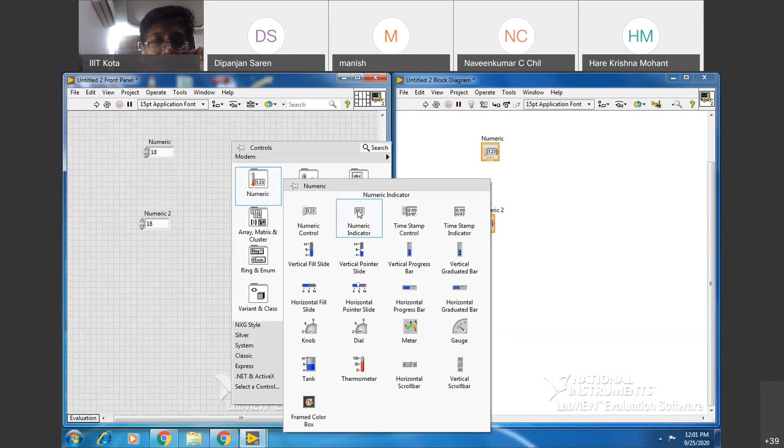Now how is the numeric indicator? Let me put, this is the control. This is the control 1. I have edited the name. Double click on the name, and this is the indicator 1. Now you can see the control 1 is giving one output, and the indicator 1 is taking an input.

So this is, I can connect the output of control 1. I am connecting it to the indicator 1. Is it clear? Now if I run the program, what should come? Can you see there is some name on the untitled front panel? There is a name on the front panel and block diagram.

Sir, I have a doubt. While editing the name of the indicator, if we press enter, it will just come down. How to get out of that?

Yes, I can write more description. See, these are the description actually. These names are actually descriptors. So suppose you want to add some additional description, that also you can put. LabVIEW allows putting some text description on the front panel or block diagram. So either you can put the description in the name itself, or you can put a separate descriptor somewhere else.

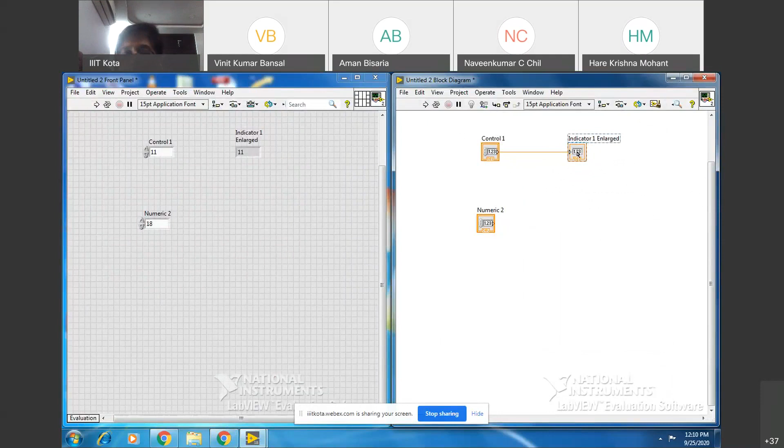Once, I will ask that you delete your indicator like this. You delete. I have done this. Can you see this, is it coming like this? Yes, sir. Can you put Control B? Please press Control B. The broken wire must have vanished.

Now again create the indicator. You have created the indicator. Name it indicator. Done. Now again connect. Yes, could you do that? Yes, sir. So this is one way of connecting, creating one control and indicator.

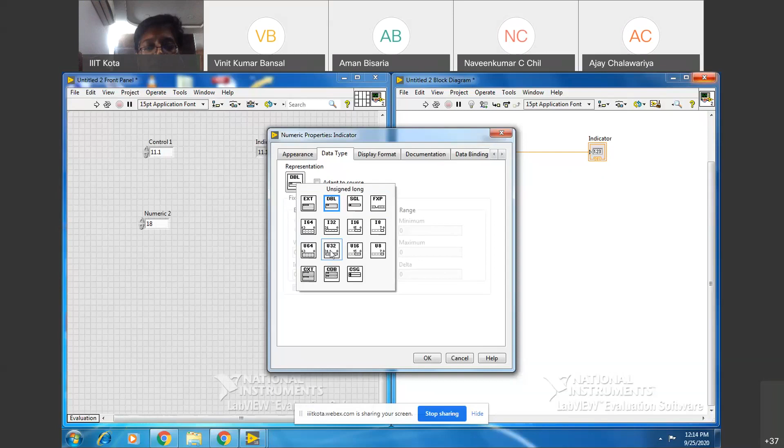In the data types, can you click on the representation DBL? Yes, sir, so in DBL there are so many options. This is extended precision, EXT. DBL is double precision, then single precision, fixed point, then integer. Could you see this - quad, long, word? Let me choose this long one. Then you have unsigned type also, so many things are there.

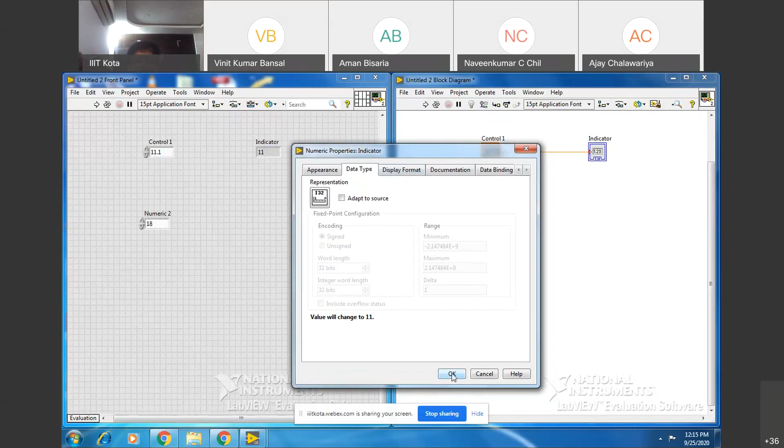So I have put the integer type. Can you see this value will change to 11? It is showing. Sir, should we select I32? You can select, no problem. Okay, sir, you can select. Can you see there is some change in the block diagram? The outer periphery of the indicator has become blue colored. Yes, sir, the outer periphery has become blue colored. Right, so I will click OK.

So now you can see the indicator. If you give the control 11.1, but since your indicator is integer type, it represents only the value of 11, right? If I put the value to be 11.6, what should it represent? It will represent 12, the next integer value. It is approximating, right?

Is it clear? So first thing all of you have to remember is how to make out the data type.

The data type in the LabVIEW environment can be floating point, which will be orange colored. Then it can be integer, which will be blue colored. It can be string type, represented in pink color, or it can be boolean type, the true-false logic, represented in green color.

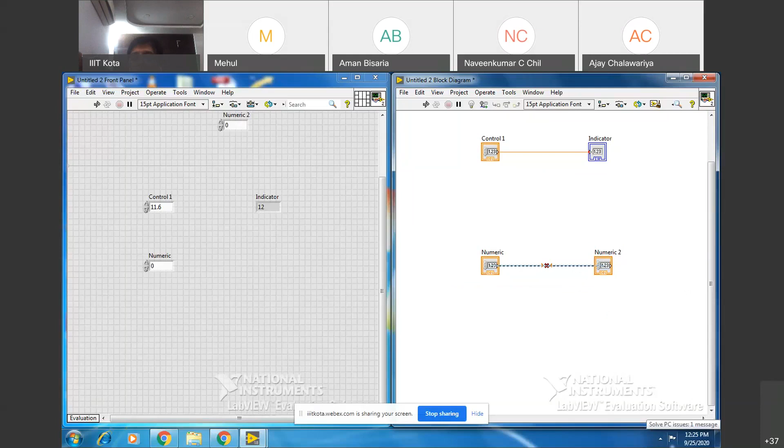So what I have to do, I have to show this broken wire, dotted wire, and then a red mark on that. It says this is an invalid connection. You cannot connect two sources. Yes or no? By definition you cannot connect two sources to each other, right?

When you take it now, have you seen one cylindrical object? It has appeared. The cursor has become cylindrical type. Yes, sir. So if I will just click it and extend it, what is it doing? It is taking one connection.

So that is another thing, and this one is for highlighting. Can you see the arrow type? This arrow type, can you see? This means this wire will be highlighted. So when it becomes an arrow, then only you should click.

Now you can select that particular wrong connection and you can press delete. That has been deleted.

Instead of this, what I will do, you just see this also. I have connected these two. This is a wrong connection. And then I'm connecting this also. All these are wrong connections, right?

Suppose I have to delete this particular segment, the top. What I'll have to do is highlight this and press delete, right? Then that segment will be deleted.

Okay, if I will put Control B, then what will happen? Actually, you always remember Control B will delete all the wrong connections. If I put Control B na, it will clear everything. You just see all the wrong connections, it will be cleared.

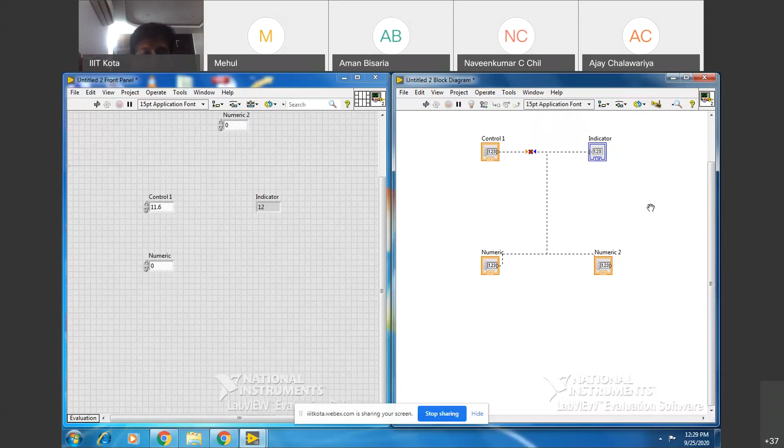Yes, sir. And redo wiring is what? Control plus Shift plus Z. Could you see, it has again done the same thing? Yes, sir, okay, so these things are already there.

Okay, so Control B you have to be careful with, because sometimes one connection is wrong, and since the system is interconnected, the wrong connection will be propagated backward also. Yes or no? Yes, sir, it may highlight many wrong connections. So if you use Control plus B for Bombay, what will happen then?

It will clear all the connections, all the wrong connections. So you will have to do it again, sir? Along with the wrong connections, it disconnects all the wirings. Instead of that, can we individually select and delete the wires? Yes, that's what I'm saying.

Suppose this has become - I'm connecting two sources to one indicator, two controls to one indicator. That is wrong, because somehow control 1 is connected to control 2. Now this control 2 - yes or no? So what is the wrong connection? Wrong connection is this much only. So if I highlight this wrong connection and eliminate it, that connection stays.

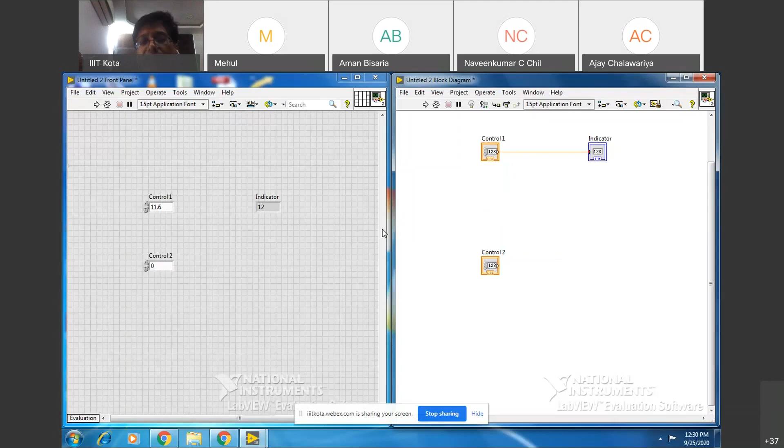But suppose I had done Control plus B for Bombay, then what will happen? All the connections vanish, sir. Means if it's a small circuit, we can manually do it, but if it's large, we need to go with this one - Control B. So use Control B for Bombay very carefully, otherwise all the connections will be removed - all the wrong connections will be removed.

Okay, so now some basics we have seen. Now let us see these on the front panel. Please come to the front panel, all of you. On the top row, what is coming? File - could you see new VI? Then edit, undo wiring, redo wiring. So these all - copy paste everything, then remove broken wires.

Could you see this Control plus B for Bombay? Then clean diagram. Cleanup diagram means it actually makes it compact.

Suppose it is scattered on the block diagram, like this, and now I'm putting Control U - it has arranged it. Could you see what I have done? It was like this - my panel, block diagram was like this. It was scattered, all the terminals were scattered. Now I want to arrange them. What I can do is bring them manually, I can put them like this manually - so this is one manual way. But if there are many terminals, it will be difficult, so I can take the help of - what I'll do is just put it like that and Control U. It has arranged, okay?

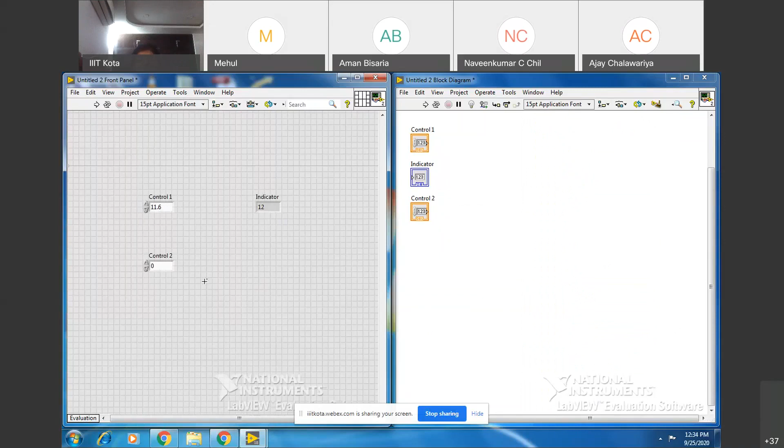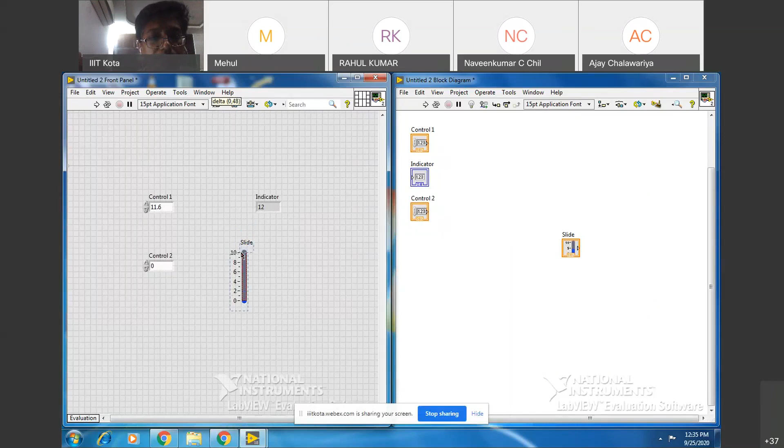Okay, now let us come again to the front panel. Right click, go to numeric control. Now this numeric control - just see, this was the numeric control, then there is a vertical slide. Can you see this vertical slide? Yes, sir, thermometer - sorry, slide, right sir, whatever you call it. So in the case of the numeric control, you can increase the values by 1. Can you see? The upside is the incrementer and the downside is the decrementer.

Can you see the hand? It has come up, yes sir. And with every click it will decrease by 1 - by whatever value you put, it will decrement by 1, and the up is increment by 1. If you want a specific value to be put, you have to write that, say 10. Okay, 10 you have written. So now if you increase, it will increase over 10 with every click, and it will decrease over the value by 1.

So that is one thing - now these are for discrete values. Suppose you want to calculate x plus y, so you'll give this kind of control. But suppose you have a continuous input, then you'll go for this slide kind of control. Now can you see this? I can enlarge it - I can enlarge it.

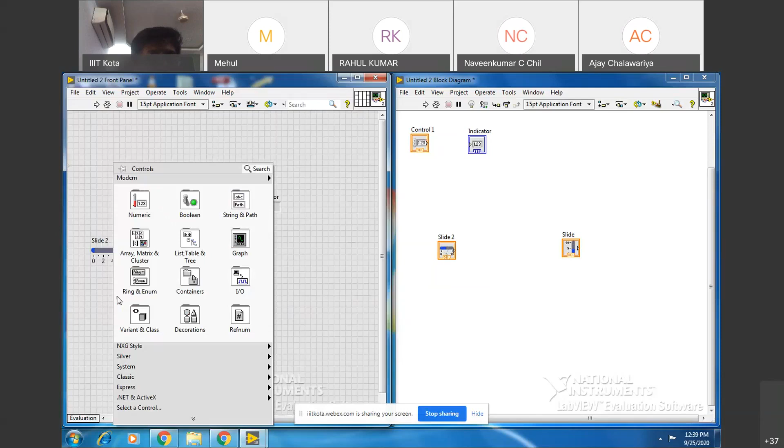Now this third one, you can have a horizontal slide. You can have horizontal slide. Okay, then you can have knobs. Can you see the knobs?

Sir, will we be creating any machine by the end of this course, sir, by using all these instruments? First, for today, we'll be learning mainly the controls, indicators, and the programming aspect.

Okay, we'll also be making one fuzzy logic controller, the greenhouse controller. Those things will be on day 4. That is there. Yes, sir. Actually, it's very interesting, sir, I just can't wait to do it. So just you see this.

Once you see this knob, can you see this? Yes, sir, we can change the numbers as well. This you can change the values. Okay, this value you can change. Okay, can you rotate the knobs?

It is just like we are manually doing it by hand. Feels like that. Yes, yes. Can you see that all of you are following?

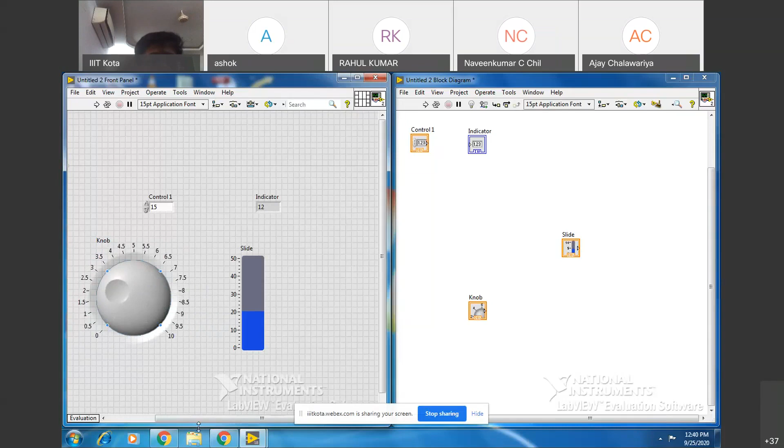All are following. Yes, sir. I'm not getting many responses. Yes, sir, we are following. All are following, yes, sir, we are following.

So these are the knobs, this is a knob. Okay, so if you want, suppose you have seen a function generator. In a function generator, how do you change the frequency through the knobs? So you can change using that. Okay, so whatever the system replica you want, suppose you have numeric control, you can use that. If you have vertical slide control, you can use this. If you have knob kind of control, you can use this. So many things you can do.

Okay, now the next one, let us see the Boolean. Boolean, just a Boolean, you just see there is a push button. Okay, can you see this Boolean, gray colored?

Okay, now if you put the indicator, create indicator, how is the indicator for the Boolean? That indicator is again another Boolean. Okay, so if I run that,

suppose I have clicked, just you click on the push button, this is a push button. So if you click, the LED will glow, this is green color. And if you click on that, it will not glow. Okay, so suppose it is glowing, so what should be, if I run, what should be the indicator value? What should be this indicator?

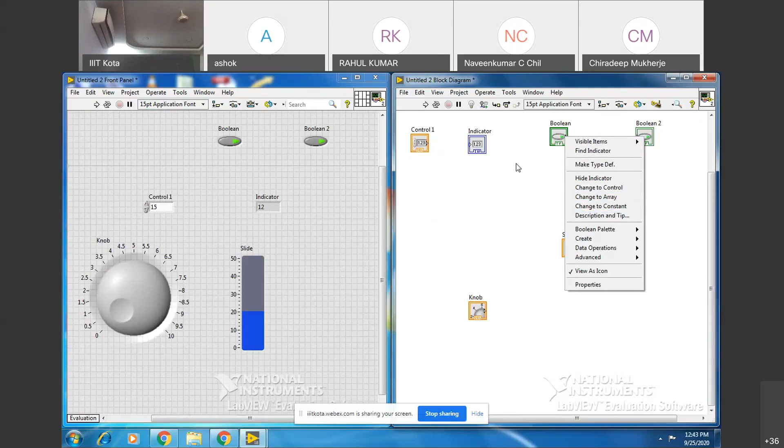Yes, sir. Fine. Now it's working, sir. Yes, it is working. All of you have done that.

So as I said, the controls we have seen can be numeric control, slide control, or knobs. These are different kinds of controls. What can be the other control? The supply of data to the block diagram. Suppose you take a text file or Excel file and supply data through that, that is also one input.

Yes or no? That is also regarded as an input. And what are the outputs? Indicators are one output device. LEDs are another output. And then what can be other indicators? Can you tell me?

Graphs, waveform graphs, where you see the waveform charts - those are waveform charts that you see. So what is that? That is nothing but an indicator. Yes or no? So that is also one indicator, right?

So we have seen about block diagram. Let us create another VI. You would like to save it. So go to File, Save As. This is not a great thing, but just I'm saving my session.

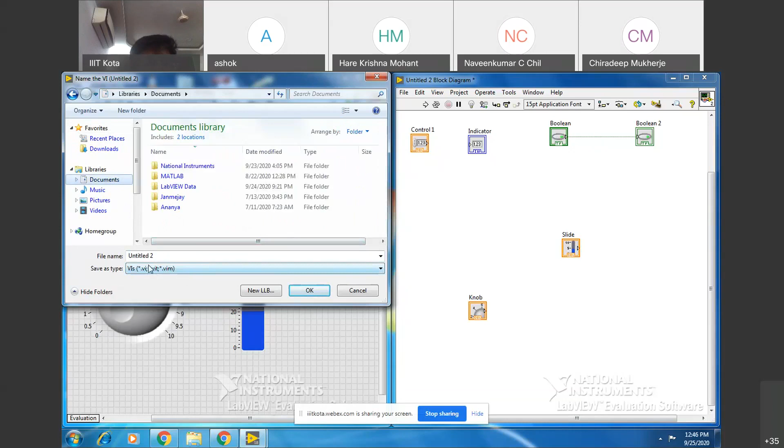Save as. I will say - sir, is it saving as a document, sir? No, it will save as a VI, .vi. It is written here, that it will save in LabVIEW. Yes sir, but it was taking me to... Okay sir, I will select that.

Okay, then I will select as Untitled 2. Do we need to save it, sir? Can we give it any name, sir? You can put anything, that is just a practice one. Okay.

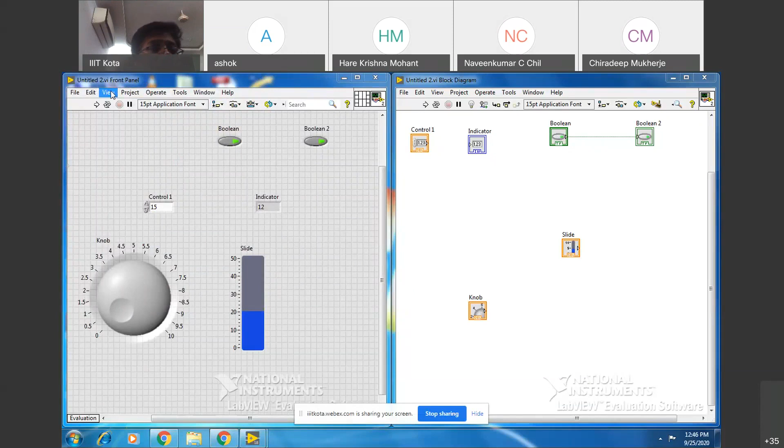Just I have shown how to save it. Now if you'll go to the corresponding, can you see this Untitled 2.vi? That is the name of the project.

Now we can open a new one, a new VI. Open one new VI and close the old one. Again we can put Control T. It has come like that. Now what we'll do?

We'll learn something more about this. Suppose we want to implement the area of a triangle. So what is the area of a triangle? Half of base and height, right? Area of triangle is half into base into height.

Now if you'll see, area of a triangle is an output indicator. What is half, 0.5? That is a constant. And what is base and height? They are nothing but the controls - they are inputs, right? So what we'll do, suppose we want to create one control.

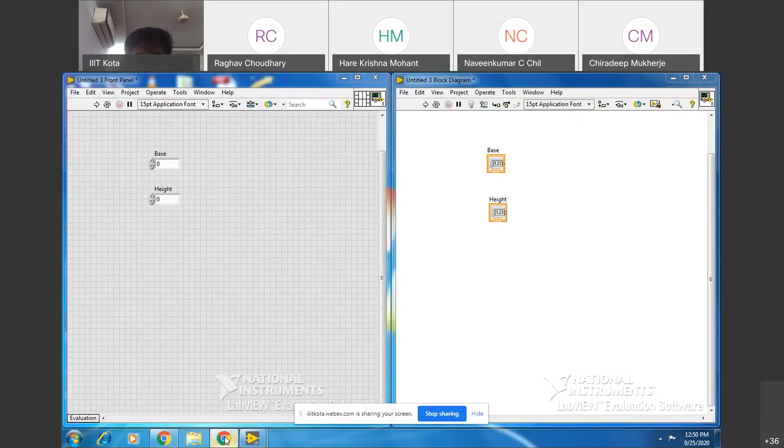Excuse me sir, hello, can you please turn off your video because sometimes the presented screen is getting frozen over here. I think I have turned off my video. No sir, your video is visible. Is it? Oh yes sir, because I thought it is off. No problem, I'll just turn it off. I thought it was off actually. I'll just make it off.

Yes sir, now it is fine. Now it will be better, sir. I'm sorry, are you following now? Everyone is following. Yes, sir.

Just see, I have highlighted the block diagram. Okay, my cursor I have highlighted there. I have clicked left click on that.

Clicked, okay. Now with your left hand press the control button, and then with your right hand, in the left click of the mouse, you drag it. Are you able to do it?

I have not released yet. Can you see, it is still, I can move it. Understood, sir? Now I'll release. Now I have put it at one point. I can delete it also. Okay, I have deleted it. Understood. Okay, so this is another way.

So I could have done like this. I could have put control, and then I could have pasted it - Control C, Control V. See what I have done in the base: I have highlighted the base terminal, and I have put Control C after highlighting, and then clicked somewhere and put Control V.

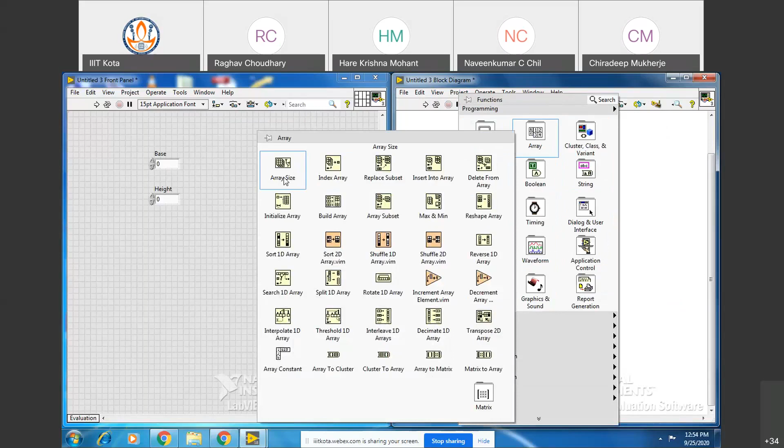Now these are arrays, can you see the array size, index array? So many array types are there. Then numeric, you just see the numeric. What are the functions in the numeric? Add, subtract, multiply - what do we need to do with this, B and H? We need to multiply them.

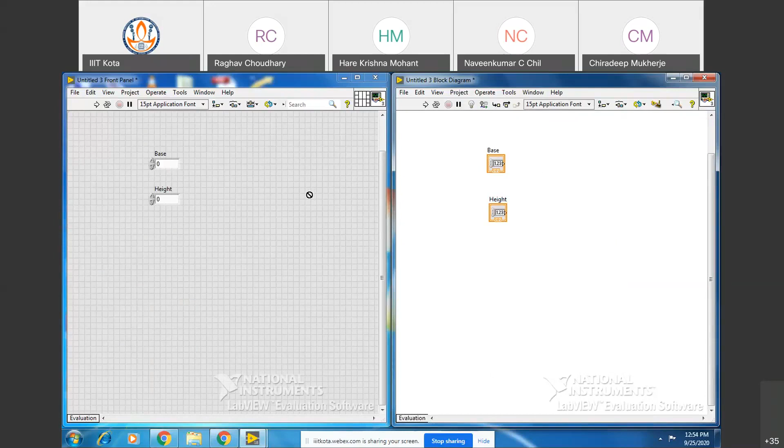I'll click on multiply and then if my cursor is there, you just see it is not allowing me to put that on the front panel, right? Yes sir. So I put it on the block diagram instead.

Okay, now just see this, I have put my cursor over it. Can you see what is happening? You are seeing two inputs. It will take two inputs and give one output.

So here what is it showing, x? Can you see x? This is what, downside is what, y? And what is output? X multiplied by y.

Okay, so it means whatever you connect on top, you just take this connection and connect here. It has automatically connected. Then again just see, my cursor becomes a plus sign, then it is highlighting that.

Then I put here, meaning this connection I can take. I will left click and once I left click, I'm just dragging here, connecting to y height. Okay, you have done it. So you have calculated base into height.

Now again what we'll have to do, we have to multiply this base into height product. So this will give me base into height, but this has to be multiplied with something else.

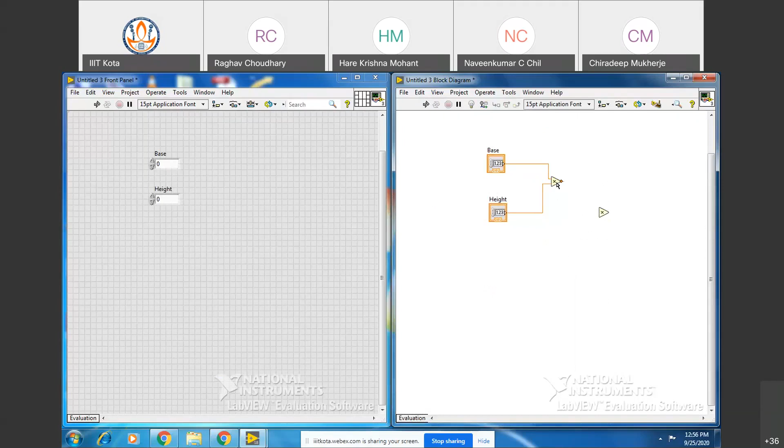And the other way, like I have taught you this, I will highlight that. Can you see this multiplier is highlighted? Again put control with the left hand and then I will drag it. Another replica has come.

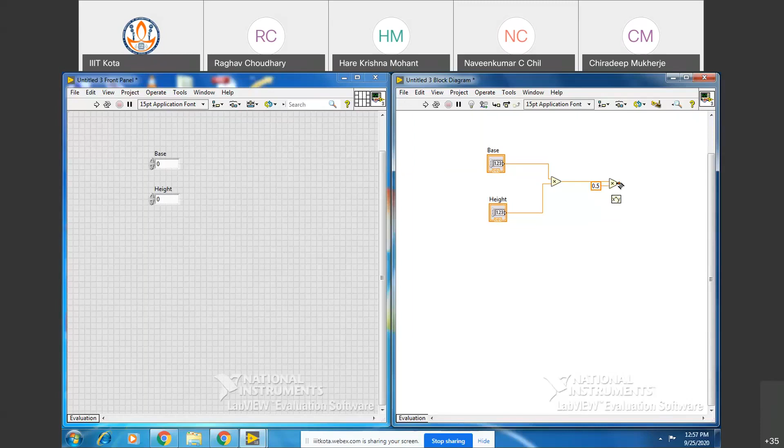What I have to do, I will not create any indicator separately or by going into the front panel. I'll simply right click on this and say create indicator. Can you see it has come? And what I'll name it, I can name this as area of triangle, right?

Now it is all visible to everyone. Sir, where did that create option come, sir, to create the 0.5 input?

I'll just show, see this. I'll again, what I'll do, I'll put this node here. Can you see here on the input side? Input side. Either LabVIEW allows you to create there. This part on the left side is what is your input, and the right end is your output, right, for a product.

So I will right click here. I will go to create control. It has created me one control. Means right click on that input term, on that dot. Yeah, now I got it, sir. Yes, again right click, create, again another control.

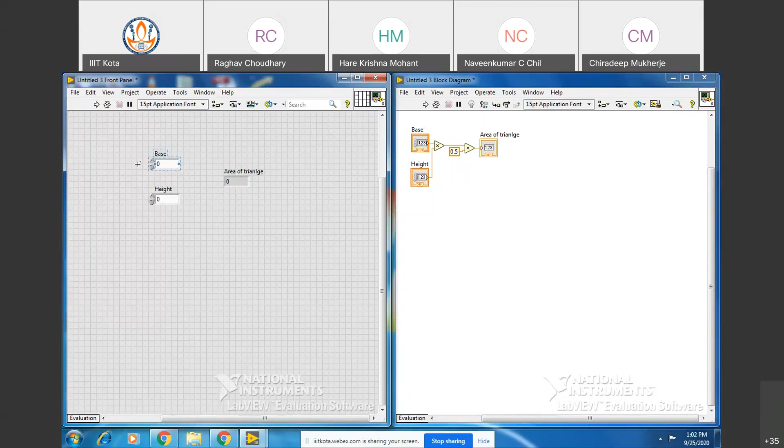Now come to the block diagram. Now you can see this base, this is control here. So this is what? This base on the block diagram, what is that? That is called as terminal of that control, right? That is called terminal. Whatever value you'll be entering, passing on the front panel, the block diagram terminal will be taking the same value.

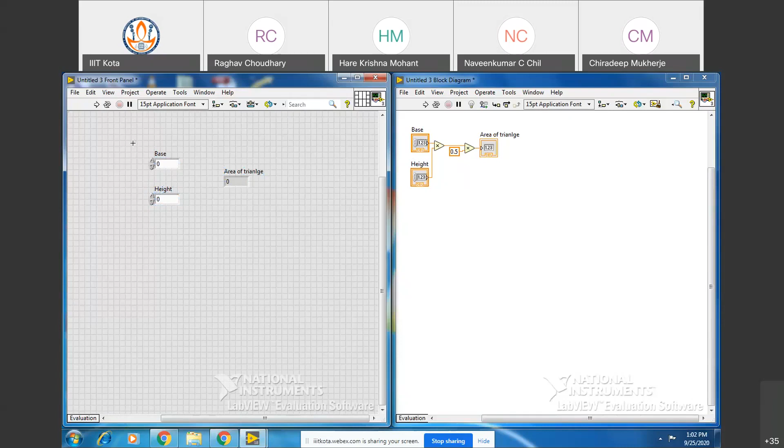And this height is what? This height is again the terminal for the control height. Okay, that is one. So for every control you have the terminals. For every control you have the terminals.

Okay, right? Now you just see this product. This product, this multiplication, what is it? These are your functions. This is called nodes. This is called node. This multiplication, this product, what is it called? It is called nodes. So your nodes can have functions.

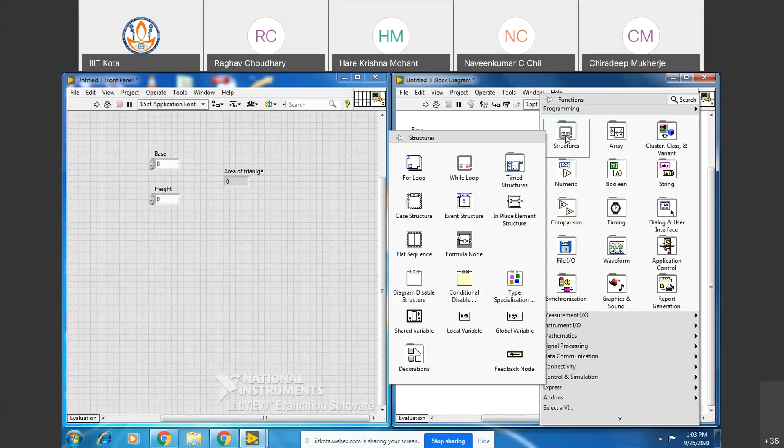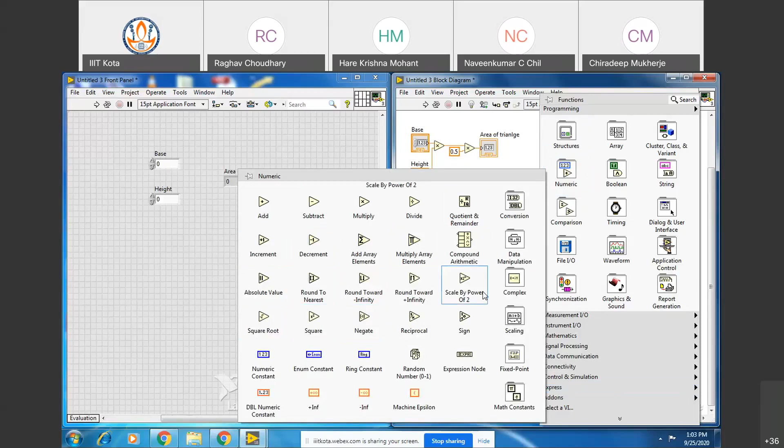So functions can be addition, subtraction, multiplication, division, everything that we do, it can be everything. So these are all functions. You just see how many functions are there. So you have these structures: for loop, while loop, case structure, flat sequence, everything is a function. Numeric control, all these are functions. Can you see? Square root, square, absolute value, round to nearest, increment, decrement, multiply array elements, compound arithmetic - everything is a function, a node for LabVIEW.

Then you have Boolean, string, comparison. Just you see the comparison: equal to, not equal to, greater than, less than. All these are functions. So all these are called as nodes. So you have terminals, you have nodes. Then you have constants. Constant - could you see the control from the front panel has been appearing as terminal on the block diagram.

When you create a constant on the block diagram, does it appear on the front panel? No, sir, that will not appear. When you create nodes on the block diagram, does it appear on the front panel? No, because it has nothing to do with the front panel operation.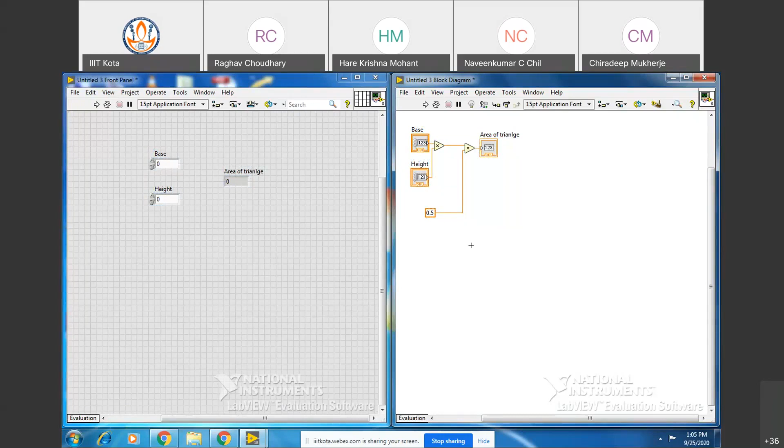For the user, they want to input the values of base and height, and they will know the area of the triangle. So for any user, only the controls and indicators are important. The rest—connections, functions, constants—all appear on the block diagram. So the base and height terminals on the block diagram are called terminals. The constant is a constant. These products are your nodes, and then you also have wiring.

Wiring, does it appear on the front panel? No, it does not appear.

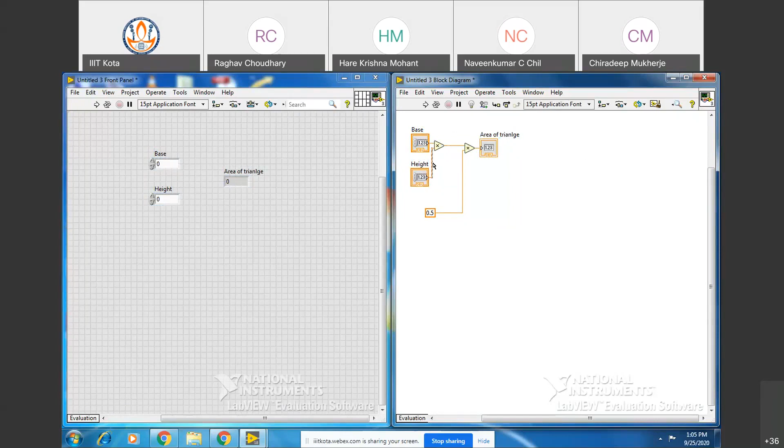And the free labels—suppose you double click somewhere on the block diagram. This exercise, or this VI, calculates the area of a triangle, and then it is appearing. Is it appearing on the front panel? No. So it will not appear on the front panel.

Now always remember one thing: can we run continuously? So now the area of the triangle—let me put 10 and let me put 5. How much is it coming? 25, right? Is it correct?

Okay, it is correct. Now I'll just do one thing. It is running in continuous mode, isn't it? Can you see this abort button, that it is running continuously? Then abort, then highlight execution. Could you see, after pause, on the block diagram there is something called highlight execution?

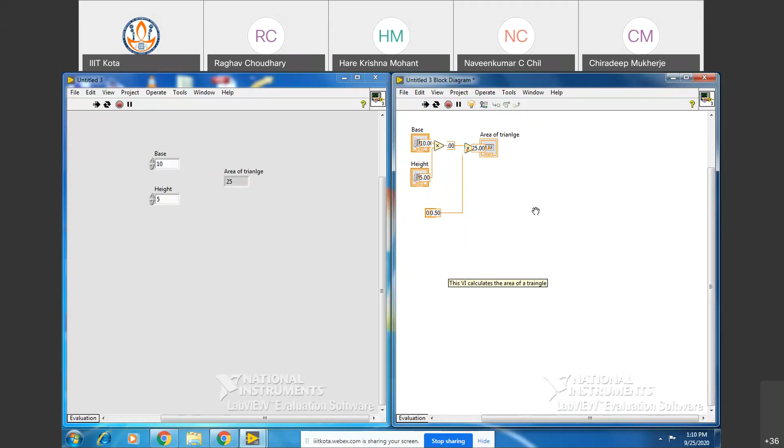So what is the execution order of the LabVIEW code? From the left to the right. From the left to the right.

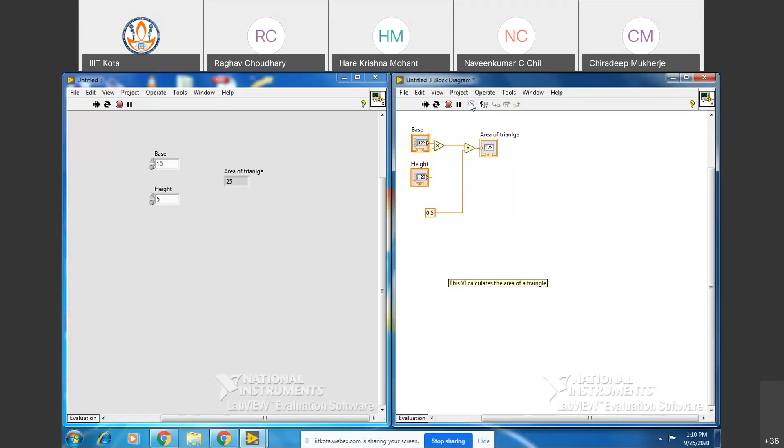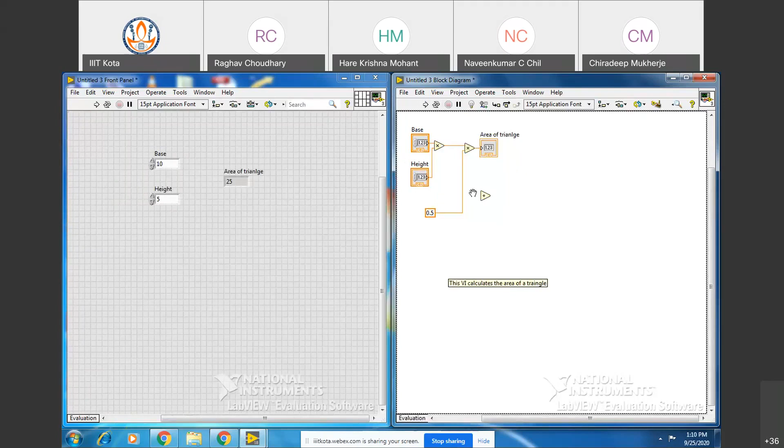Now, suppose I stop the execution. Suppose I had made another multiplication numeric control. How do I run this? Running, this white button is there on top.

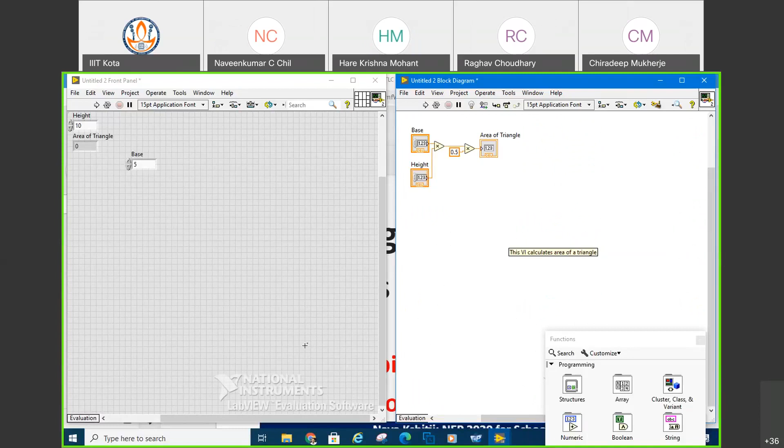Video output is not there, sir. Means? Sir, Mohanta sir, I think now, yeah, it is coming now. That it is correct, sir.

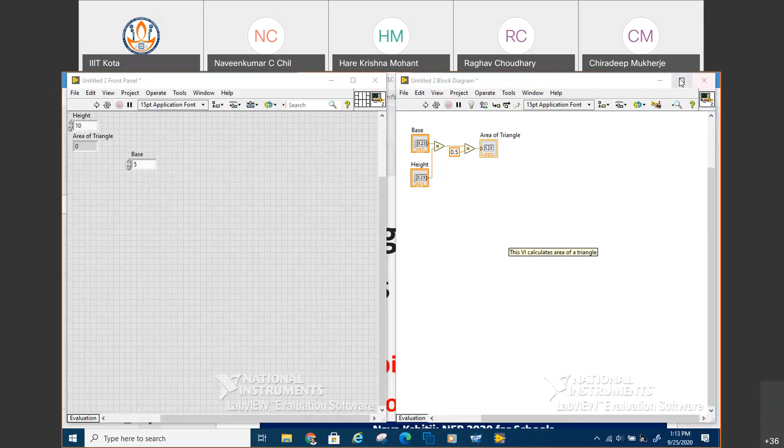I'll stop. How to stop? Stop sharing, just 1 minute. Yeah. Nice, sir, that. It will be in the WebEx, that stop sharing, in the WebEx meet here on the. So that WebEx is gone actually. Acha, so should I.

From here I can... Sir, I think you should start sharing, sir. Then the previous one automatically gets means. I'll just that. I'll just share, I have started share. Then yes, you are true. Actually, yes sir, it's coming soon, now it's connected, yes right.

So now, is it clear to everyone what is the way of execution? Now could you see what I have done? I have deleted the output of the base and height. Can you see the broken wire connection there? Yes sir, okay, because there is no input here and there is no output here, right?

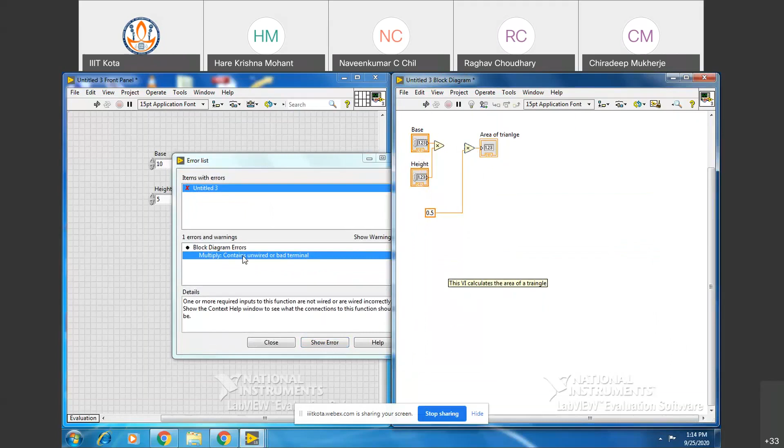So now just see the error list. What is the error list? It is showing multiply bad. Just see this, it is expecting some input, because it should have two inputs.

Okay sir, if we give show error, means if we click on show error, it will show the error as well, sir. Yes, it will show the error actually.

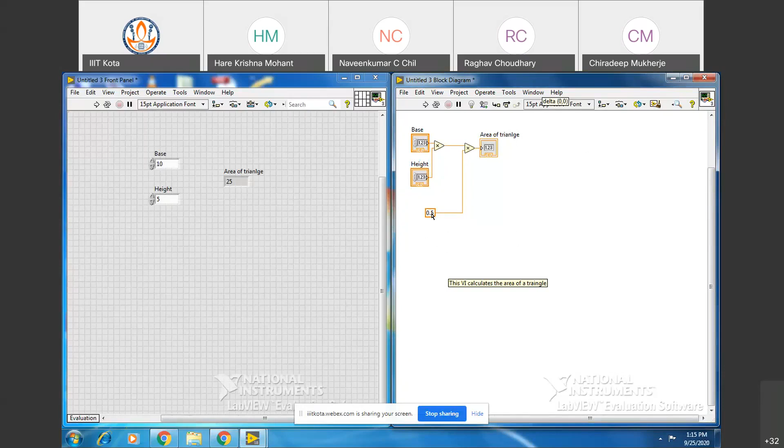It's actually very interesting software, sir. I think it is feeling like we are building the machine with our own hands. Yes, that's why I'm teaching you. Means it is not feeling like virtual, sir. Means it is actually like... there is not much coding. Matlab basic, that it is not much coding. Even one can start many things here.

Let us go ahead now. What I was saying, so this is the execution. I'll tell you, suppose numeric add, suppose I have given one add, this is another add, okay, and this is the multiply, okay. So I will say here create constant, sorry, create.

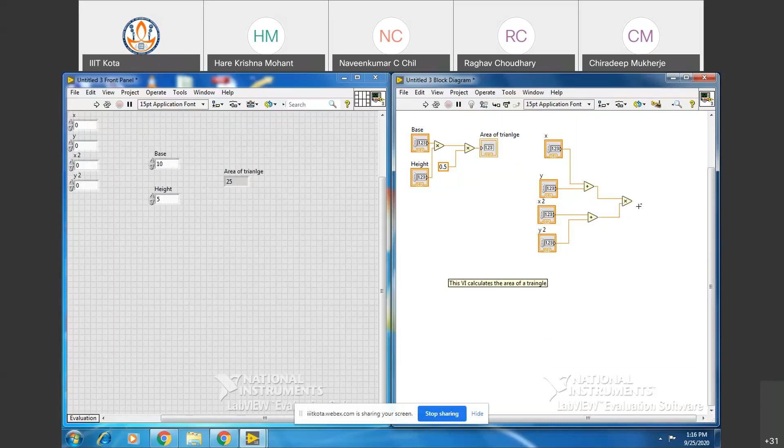Create control, by default it takes x and y, since they are being named. Again this create, it will take x1 or x2, it is taking that value, and then this create control y2, okay. And then I'll connect these two there, and here I'll put create indicator, right?

Now can you tell me what is level 1? What will happen, these two summation, they are at the same level, yes or no? Because both of them are getting the input from the controls, right? Everyone is getting, and this is at level 2. This product function, node function, will be stabilizing only if it is the output of the first stabilizers, okay.

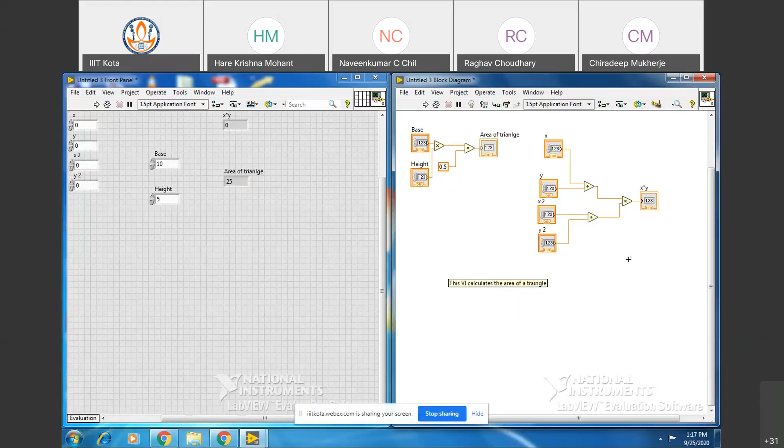Anyway, so we'll be saving this. You can save this also as your next one. Now let us, before we leave, we will do something like: suppose you click here and just highlight height, then you put Control H for help.

What has come up? Is it for help, sir? Control H, yes. Control H is for help. Can you see how I have done? I have highlighted, I have clicked on the left click on the height in the block diagram, on the height terminal, left click, then it is highlighted, then Control H, then it has come to context help.

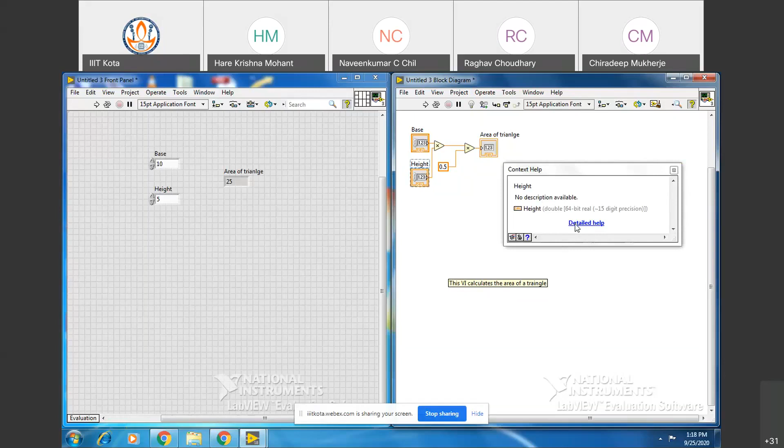So context helps are the brief description. Context helps are the brief description. And if I want detailed help, I can click on this detailed help and it will take me to so many applications. Just see the LabVIEW help, it is popping up.

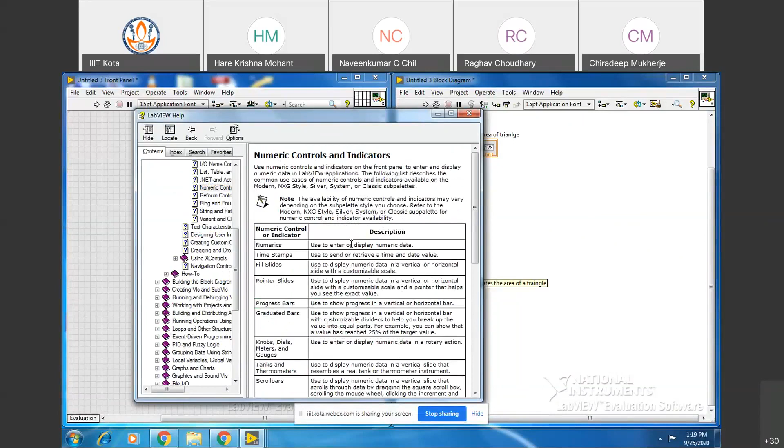Can you see this? Yes, sir. Now it is coming to so many. Now here, if you click detailed help, what happens? Context — sir, just maximize it, sir. I'll just maximize it. What will happen here? It will have additional instances of applications also, many more applications also they will be discussing.

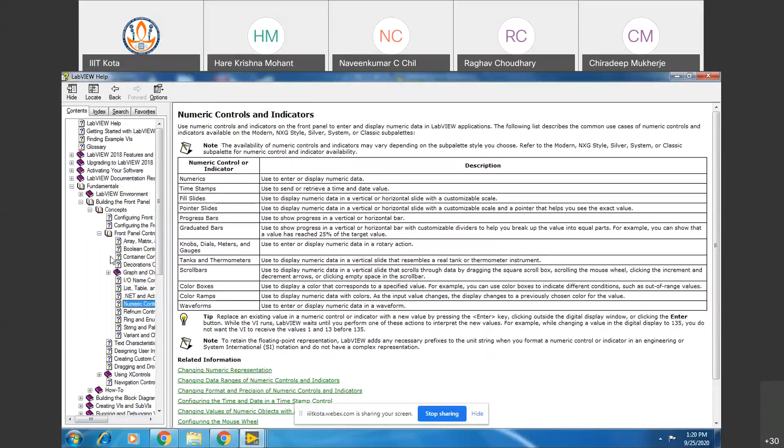So there will be some controls indicator, there are descriptions, there will be another link, related information. So you can link it all, the details will be more profound, the detailed information will be there. Okay, now you can see from here, you can go to anything, fuzzy logic, PID, so many things you can have now. Can you see that? But what I'm saying, generally one should see the help of the corresponding item, okay.

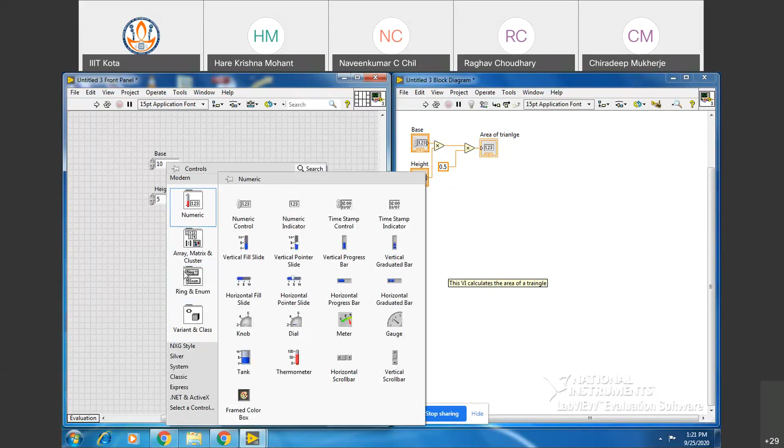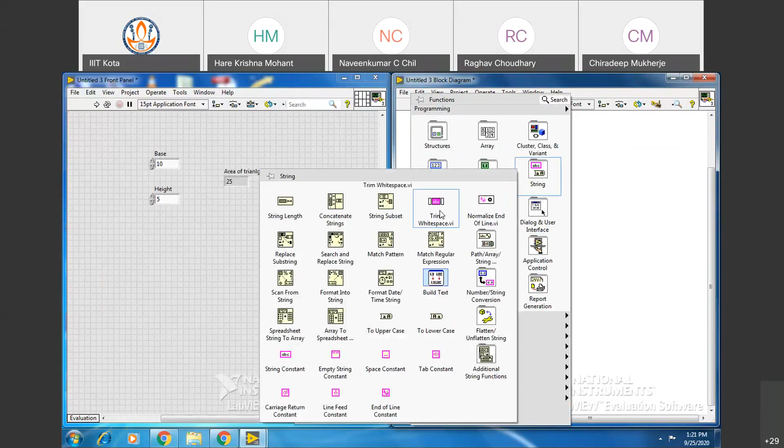Before we leave, if you have to search any controls and indicators, move your cursor on the front panel and right click. All the controls and indicators will come up. If you want to search any functions or nodes, move your cursor and right click on the block diagram. There you'll find structure, array, numeric, string, boolean, comparison, timing, waveform, so many things.

So if you want to find any controls, go to the front panel. If you want to go to functions or nodes, go to the block diagram.

One more thing: click somewhere on the block diagram, on the empty space, then simultaneously press Control plus spacebar. What has come? The Quick Drop button has come.

Can you repeat, sir? Come to the block diagram, highlight it. If you are at the front panel, put Control E, it will go automatically to the block diagram, then you put Control spacebar, the longest key on the keypad.

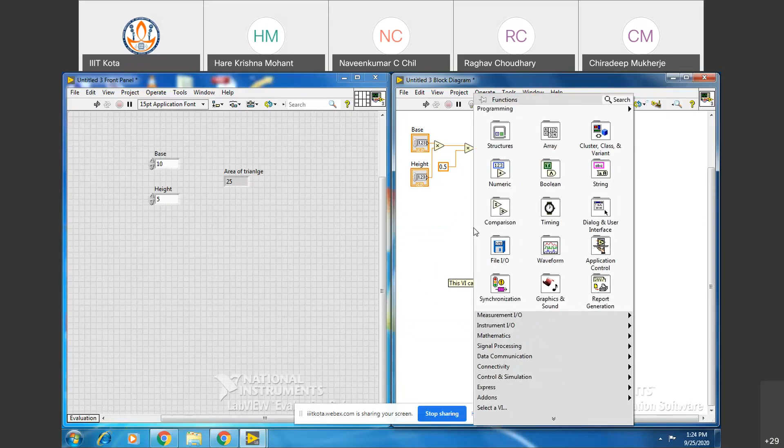Then you want to find the sum, so this is your add. Suppose I double click, see, it has come. How do we normally find this? We go here, right click, then Numeric, then Add. Okay, this is the same thing.

Let me show you another Quick Drop example. Suppose I want array and multiply - see, from multiply so many things have come up.

Instead of doing all that mouse clicking work, we can just import within seconds, right sir? These things you can do from here also using Control plus space bar, you can have this.

So you have seen this is the controls palette. Right click on the front panel gives you the controls palette. Right click on the block diagram gives you the functions palette. When you are on the block diagram, put Control plus space bar, you will get Quick Drop.

Does this Quick Drop work on the front panel side too? It will work there also, but it will give the controls for the front panel. Inputs and outputs are only 2-4, so why search so much, but for functionality sometimes it is difficult to locate, so you have to search a little for that.

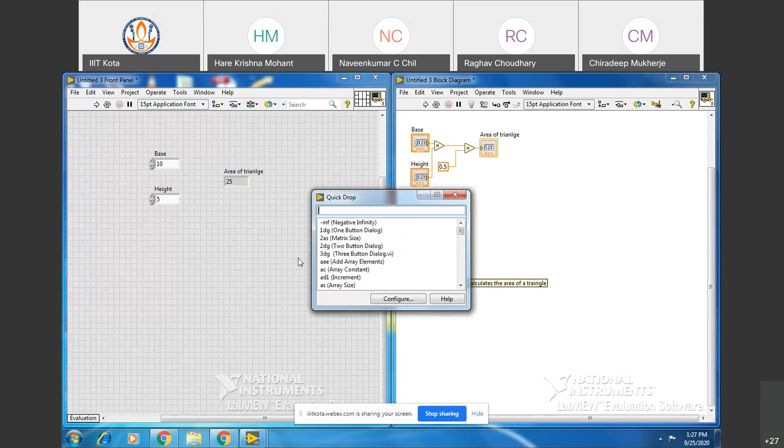And on the block diagram, when you are at the front panel, put Control E, you will go to the block diagram, then put Control space, you will have all the functions. Is this all clear?